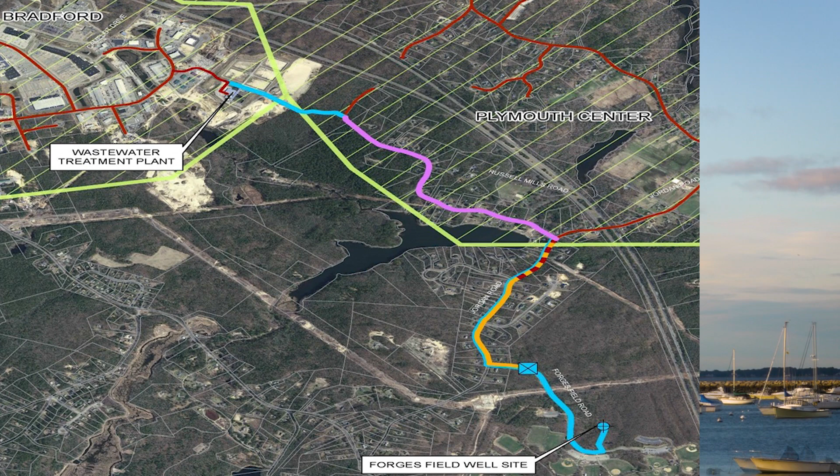We're going to talk about why we need new water supplies this evening. We'll give you a little bit more background and what we've been doing and why. We'll talk about the Forges Field well site, the pump test results, the effects or the impacts, if any, on nearby wells, what we've done to model the Eel River watershed group, and then what our future schedule is, and then we'll take questions, as I mentioned a minute ago.

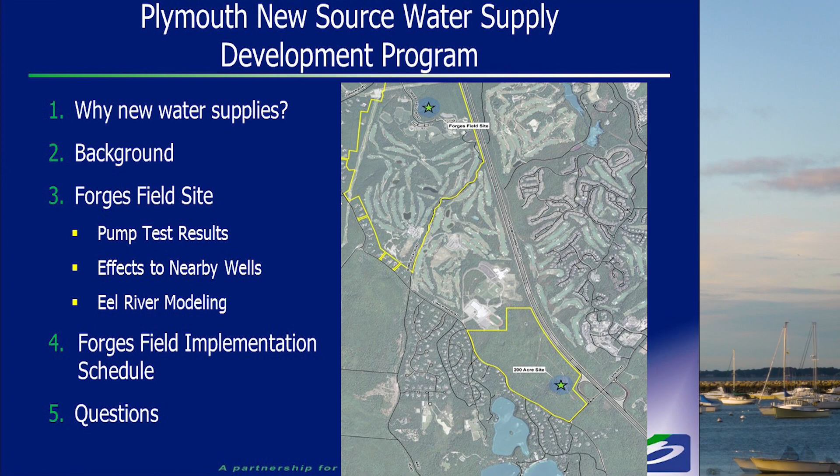Why do we need a new water supply? We need to allow for future economic development and the expansion of the water system as we have it today. We need to provide that emergency redundancy within our system and allow for flexibility of withdrawals and distribution. What we mean by that is as that peak demand increases in the summertime, we have to make sure we can feed that. We have about a 1 million gallon lack of water during those peak demand periods.

And then we need to make sure we can plan for long-term sustainability. And that's what this well will do. At least this well will start us down that road.

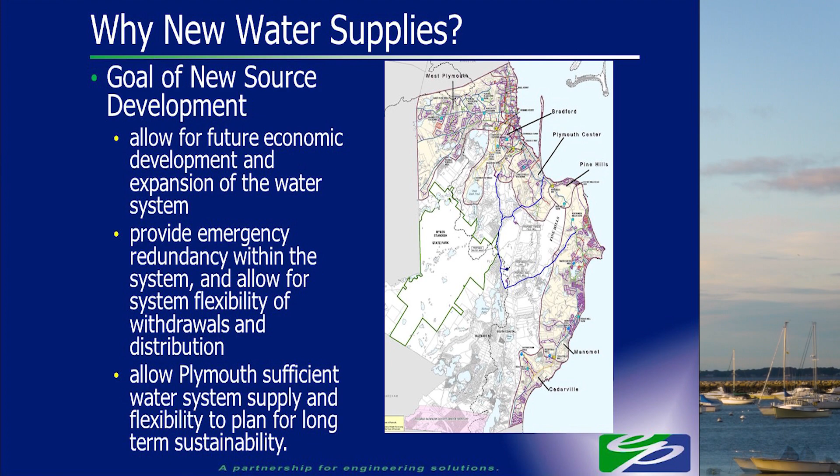This all dates back to our 2006 master plan. That's the last time that the town did a master plan. This past spring town meeting, they appropriated funding for us to start a master plan, which we are starting in a couple of months to really update that.

That master plan pointed out additional water supplies are needed, and we have redundancy issues at our current wells. We have pressure zone deficiencies, especially with Bradford, Cedarville, and Manomet. Some of the wells that 2006 master plan looked at had conservation restrictions on, so we need to make sure we were aware of that. And then there is a water storage deficit in terms of how much water we can pump into the tanks and store during those peak demand periods.

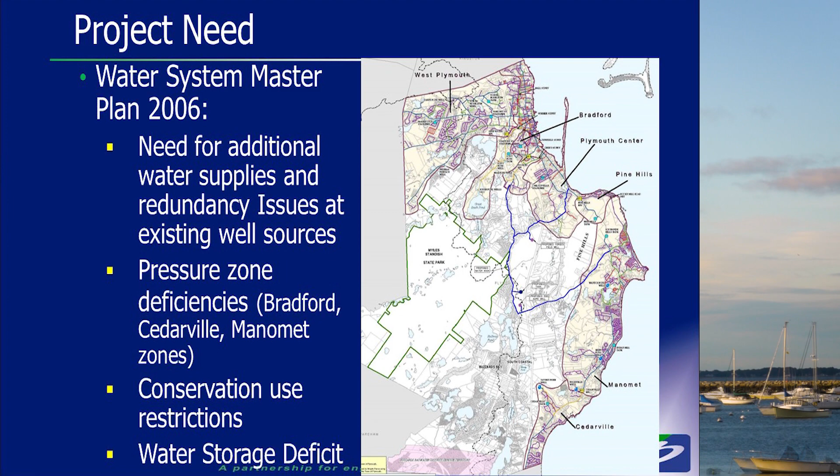So again, that master plan that was done back in 2006 identified 21 viable supply sites. Between 2008 and 2010, Horsley and Witten was the consultant the town used to do some exploration at 5 of those sites. Several months ago, the town really was looking at Forges Field and 200-acre sites, both those two. We did a lot of discussion, a lot of investigation, a lot of analysis, and we selected Forges Field as the site we went to town meeting for in the spring.

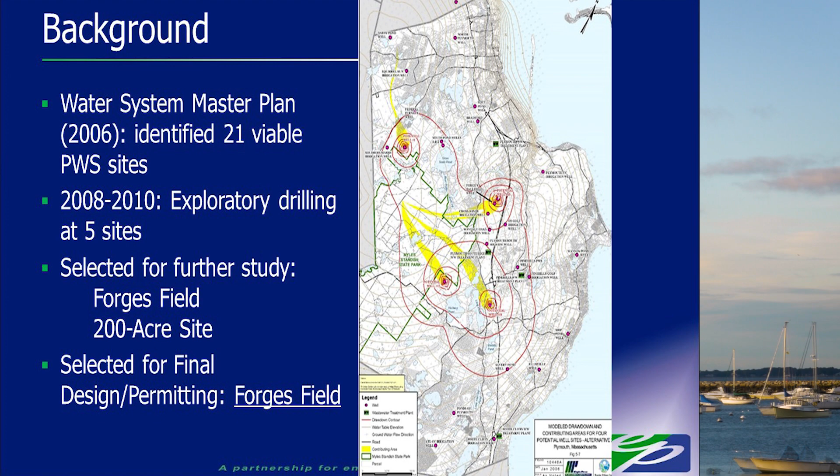Some of the benefits of Forges Field are reduced reliance on our stressed other sources, our other wells. Additional water to meet summer demands, which is really critical here. And then the redundancy for the Plymouth Center and Bradford zones. And ultimately, a lot of improved service pressures along Jordan Road and Russell Mills Road. And most of you are direct abutters, you understand that we have low pressure and some of those hydrants aren't even in service.

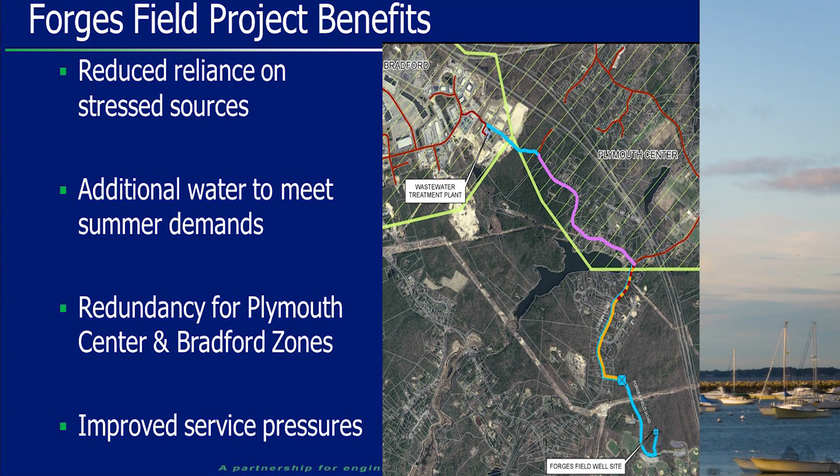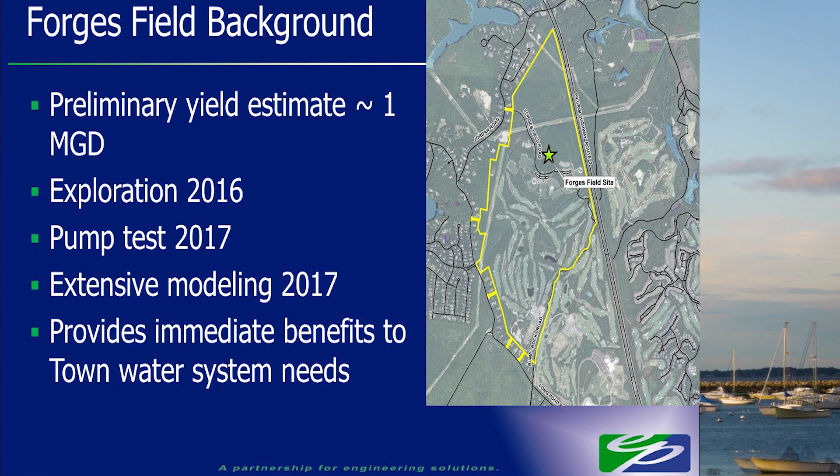So our preliminary estimate for the well is about 1 MGD, and that's what we're permitting it for. The exploration started back in 2016. We ran pump tests back in 2017, and we've done modeling since 2017 up until several months ago. And Forges Field well will provide immediate benefits to the town's water system.

So with that, I'm going to turn it over to Anne Marie from Environmental Partners. Thank you.

So I'm a hydrogeologist, and I was involved in a lot of the permitting of the water supply well, the testing, the exploration, and without getting into too much of the geology, I'm going to give you a big picture on what we did out there, what the well can produce, how we know it, a little on the geology, and then go into the modeling results, because we spent a lot of time trying to evaluate how this well will affect the surrounding area.

So again, this is the Forges Field site. This is where, in 2016, we put in 7 observation wells and 1 test well. We did exploration. All these wells go down to 130 feet below ground surface, which is where we hit bedrock. And the best aquifer material for water supply is down deep.

So the wells are all screened from about 125 feet to about 110 feet below ground surface. So it's a very deep well. The water table there is at 27 feet below ground surface, so we have a lot of water to work with there.

And so before we started the pump test, we put in water level loggers in all these wells, and they go out about 900 feet from the pumping well. And we monitored water levels hourly for a week before we started pumping the well, so we had background data on what the water levels are doing.

Then we turned on the pumping well and pumped that at about 750,000 gallons a day. Pumped the water well away so it's not coming back, and monitored the water levels in all of these wells. So we could get a good idea what the drawdown of the water table is at the well and as we get further away from the well. And that's what all went into the model, and so we could calibrate really nicely and close in at the well field and then use the existing model later, and I'll show you the model.

At the end of 5 days, we tested the water using all the required testing that DEP has, and water quality is excellent. It was just pH adjustment, which is typical in southeast Massachusetts. And the approvable yield using DEP's method was 1.048 million gallons a day. So it's about 728 gallons per minute. So that's what we put in the pump test report to permit the well.

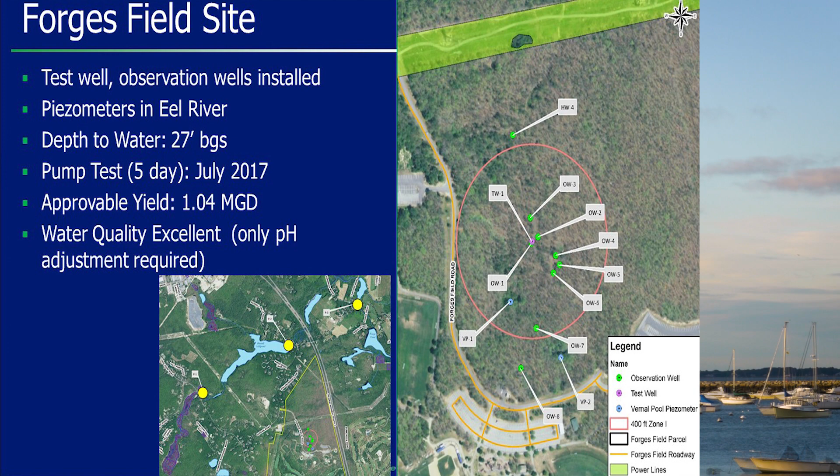So once we had all that data, worked it up, the USGS back in 2009 did a water supply model for Plymouth, Carver, Kingston, and Duxbury. They included all the production wells, any irrigation wells that they had, and the purpose of the model was to evaluate groundwater supply well impacts to the aquifer. So it was a tool for towns to use to evaluate any impacts from water supplies.

And so this is the whole model area. Here is where the Forges Field well is, right there. What we did is we took our water level data and put it into this huge USGS model, calibrated our water levels to the model, so it calibrated beautifully. And so once we knew that, we could pump the well and see how the water table reacts, and we can see where the well would get its water from. So with the model,

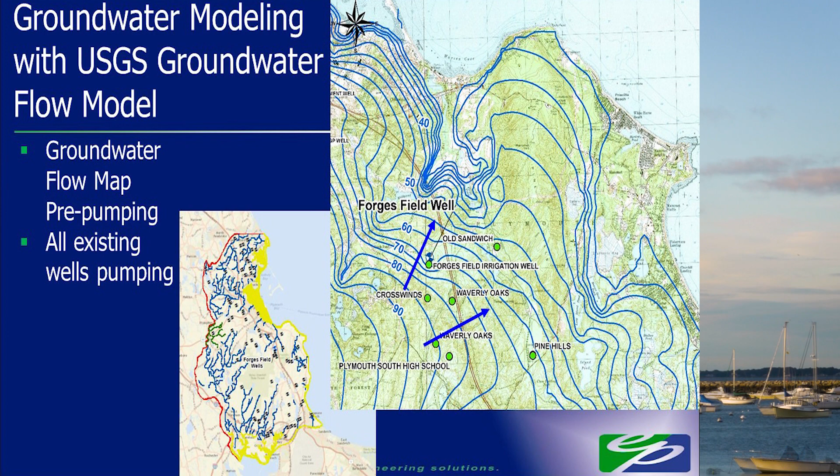let's see. And another thing, all the wells in Plymouth were pumping at the time we did our modeling. So we had the Bradford wells, the Lout Pond well, the South Pond wells, and all the irrigation wells that are in this area that pump very hard in the summer. They pump for 210 days a year, and then they don't pump in the winter. So we had all those pumping too. So we had everything going on, and we used the data for the last 5 years in terms of how these wells were pumping.

So then in our pump test report, DEP requires us, first of all, to figure out what our Zone 2 is, and this is the area that there are use restrictions. And the Zone 2 is defined: we pump the well in the model at the permitted pumping rate, which is 1 million gallons a day, and we have no recharge to the aquifer, so we're looking at severe drought conditions. And then we use the model to tell us where is that well going to get its water from. And that's what this area is here.

It goes out to Gunner's Exchange Pond. And here's the Forges Field well. These are the golf courses in here. And it's residential. So the Zone 2 land uses are all consistent with what Zone 2 DEP requirements are for land uses. So that would be drought conditions that rarely happen.

Then we wanted to look at if we pump the well at 1 million gallons a day for 100 years, how far out would we see drawdown to the water table? And that's what the area of influence is, and that's another thing DEP requires you to submit in your pump test report. So this line here represents the area of influence, and that is calculated by the 0.1 feet of drawdown with the well pumping 1 million gallons a day for 100 years.

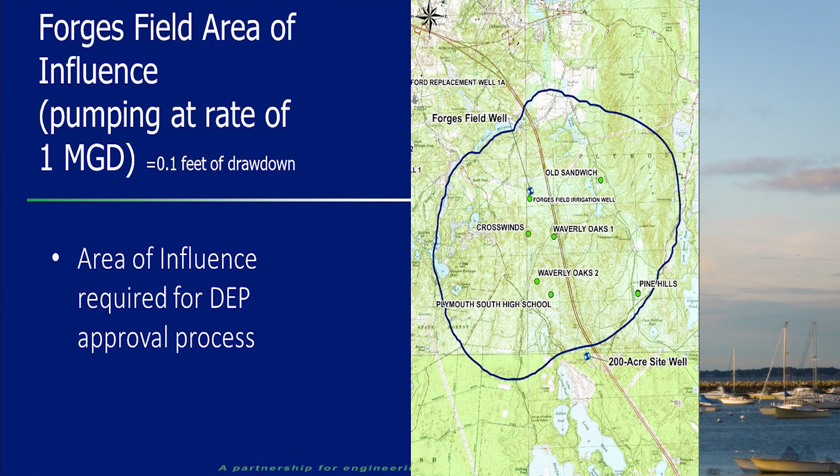So is it 0.1 feet at the border? At the border, yes. So inside of that, it could be more. Yes, and I'll show you on the next slide, it's a good question, because there's the drawdown inside and close into the Forges Field well. So here's the Forges Field well. Outside we have 0.5 feet of drawdown, 1 foot, 1.5, and then these are all 1 foot of drawdown.

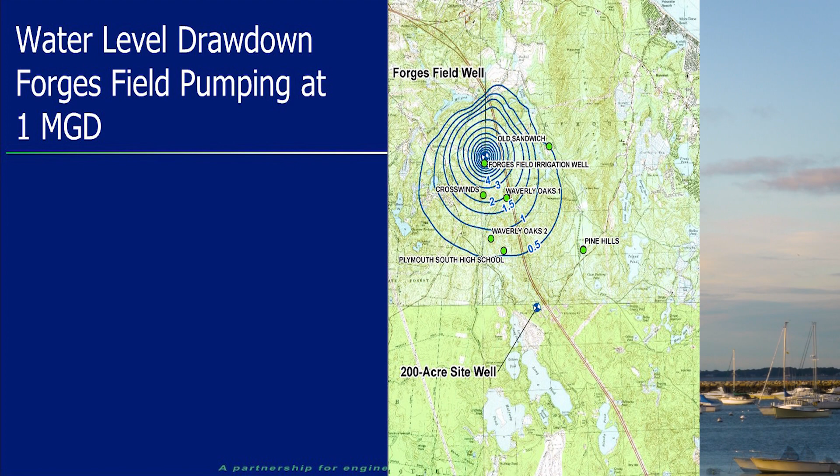So what we did is we wanted to see what is nearby that is in this area of drawdown. And again, this is 100 years of pumping. So this is equilibrium, and it takes about 5 to 10 years before you actually reach this. This is what's called steady state. And we had the irrigation wells pumping and all of the town wells pumping in the model. So we wanted to look at what the pumping effects are for the neighboring wells, knowing that everybody is on a private well in this area.

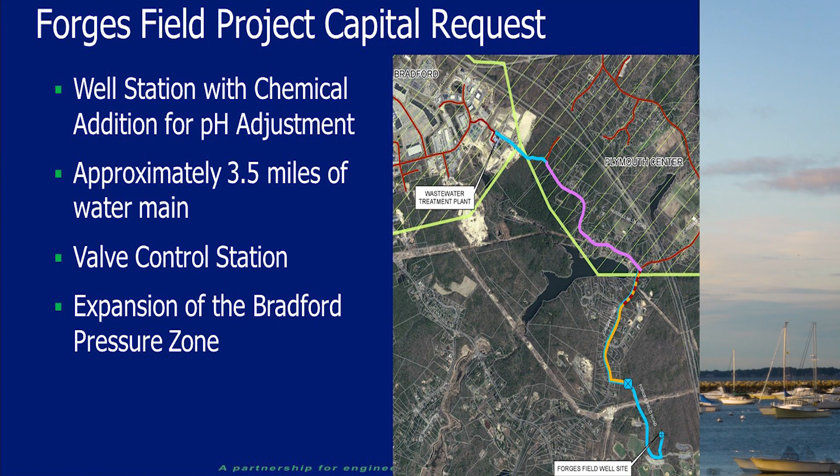I have a question. Would you please tell me again what part of town needs more water? The West Plymouth area. West Plymouth, like where? Charlotte Drive or all the way up to Carver or Route 80? Colony Place area, yep. So you're talking about the commercial section of town? Commercial section, residential. The whole zone is deficient for water supply right now. Residential and commercial? Correct, yep. The overall demand of that zone. This is going to help both? Yes. Thank you.

Yep. The water mains: as I mentioned before, we'll have parallel water mains along Jordan Road. There'll be one water main on one side of the street and one on the other side of the street, and this will separate the two different pressure zones.

Part of the project is to replace an undersized and old unlined cast iron pipe on this road, on Russell Mills Road. And as of right now, the design is pretty much final, and we're just going through a couple of the last permitting hurdles before we go out for bidding.

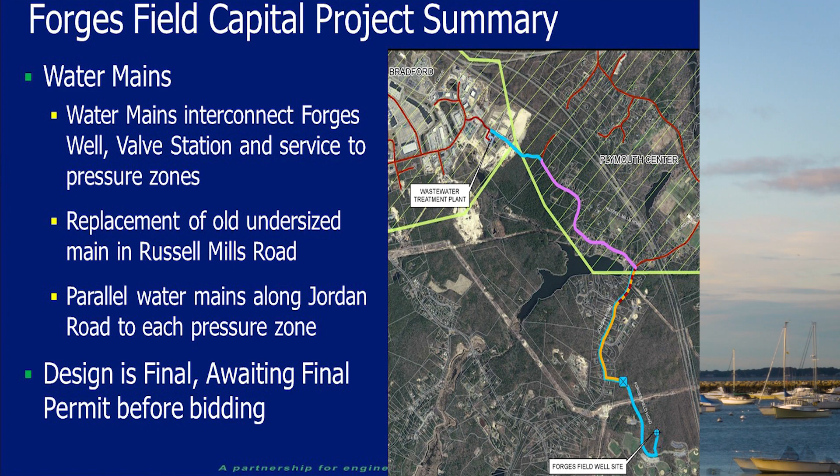If you can imagine, a project of this magnitude requires multiple steps to go through for permitting. And there's not only the local Plymouth Conservation Commission. I saw many of you at that meeting. We went there and received the approval. But we also went through multiple permits with the state. So I just want to go through those a little bit with you.

As Anne Marie mentioned, a lot of the data that we collected and she spoke about tonight was included in that pump test report that DEP has to look at. So DEP has their own hydrogeologists. They go through and double check all the modeling efforts that we've gone through, all the water quality data, make sure that we're doing our job correctly. And there's a whole entire permit and report format that we have to follow and submit. That was submitted, and we actually received that approval last week.

Because of the magnitude of adding a source to a water system and by expanding the water system in this magnitude, we had to submit an expanded environmental notification form with the state. That was submitted earlier this year, and I believe sometime in March or April, we received this certificate with no further action required. That process essentially notifies every single state agency for comment on this environmental project. So it could be the Division of Marine and Fisheries, could be the Mass Historical Commission, all these different state departments get a chance to comment on major projects like this.

And then with the local MassDEP in the Southeast region, we had to submit an approval to construct the source, which those design plans that are up at the top there, along with all the project specifications, we have to submit for their review and approval. We actually got that approval this morning, so that was good news.

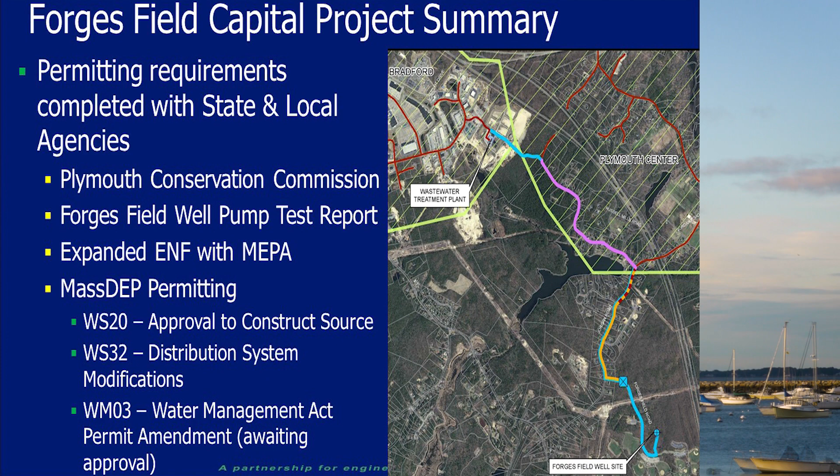We'll be submitting comments back to them, and we can anticipate a draft permit, new permit to be issued sometime in late August or early September. And then from there, we'll get into a little bit of our schedule for construction. So as you know, in April 2017, the design and permitting and bidding was approved. And this past town meeting, construction money was approved for this project.

And these are the tentative dates, depending upon the permitting cycle. We're looking at water main construction potentially over the winter, potentially next spring. But the bottom line is we're going to be looking at a very heavy construction season in 2019 and hope to have everything online in the winter of 2019 to 2020.

We anticipated doing a lot of public outreach during construction, similar to tonight. We're going to be putting the final contract documents on the town's website. Each of the homes along the project route will also be flyered, which means a notification will be stuffed in your door. Typically, we like to let you know at least 48 hours in advance of when construction will be going by your home and whether or not you'll be impacted by any of the work, so that you can take an alternate route to get to work or to the grocery store.

We'll also be providing updates on the town website, and whenever we give you a construction flyer, we'll have all that information there for you on where to go to get more information. We'll have our email addresses on there, our phone numbers. You can give us a call if you have any questions.

Some of you may or may not be on town water. Every property along the route will receive a new curb stop. A curb stop is essentially a valve that allows you to access water in the future. At this point in time, there's no requirement to connect to the water system. However, it'll be left at your property line so that if you have the need to connect to town water, you'll be able to. And that'll be for all the routes that we showed you from Forges Field Road, north along Jordan Road to Russell Mills Road, wherever we're doing the water main work.

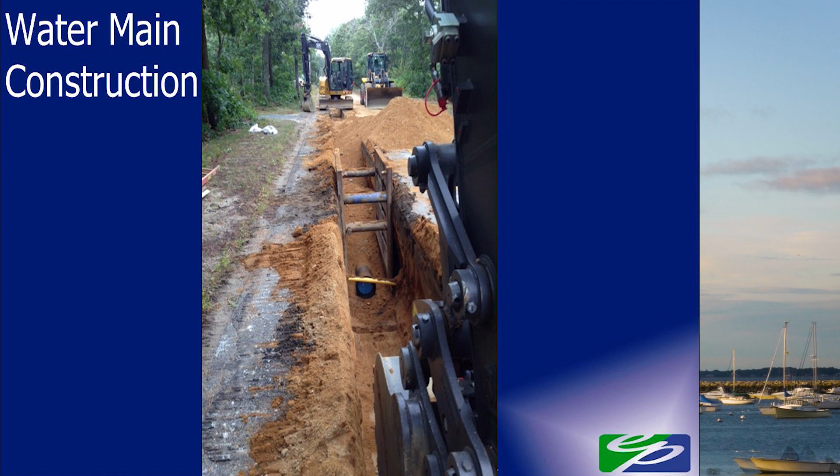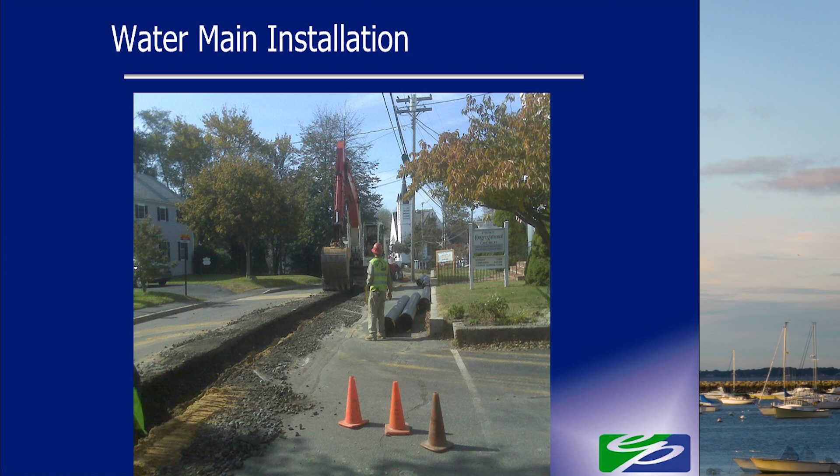So I just want to go through a couple of quick photographs about what construction looks like, and you can stop me at any time if you have questions. Generally, the water main trenches are about 4 feet in width. They excavate about 5.5 feet to 6 feet down. This type of material is going to be very similar to what you're going to find here in Plymouth, mostly all sand. And the contractors move fairly quickly. You'll be surprised. You might go out in the morning, go to work, and by the time you get home, they might be 200-300 feet down the road. So they move very quickly.

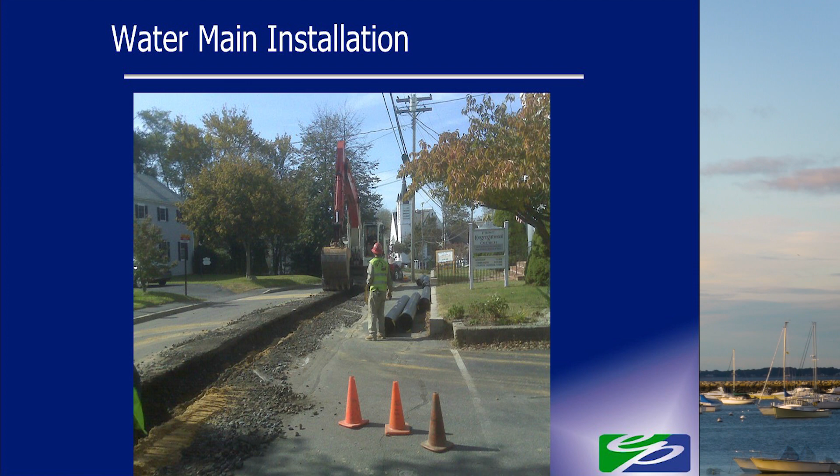They tend to excavate the asphalt and grind that down. Then they start removing some of the dirt off the top of the trench, as you can see here. They excavate the soil out of the trench, put the pipe in, and then backfill and compact it as they go. And then at the end of each day, they sweep the road, bringing up the grade with a gravel material, and then every single Friday, that trench will be paved so that traffic is fine for the weekends.

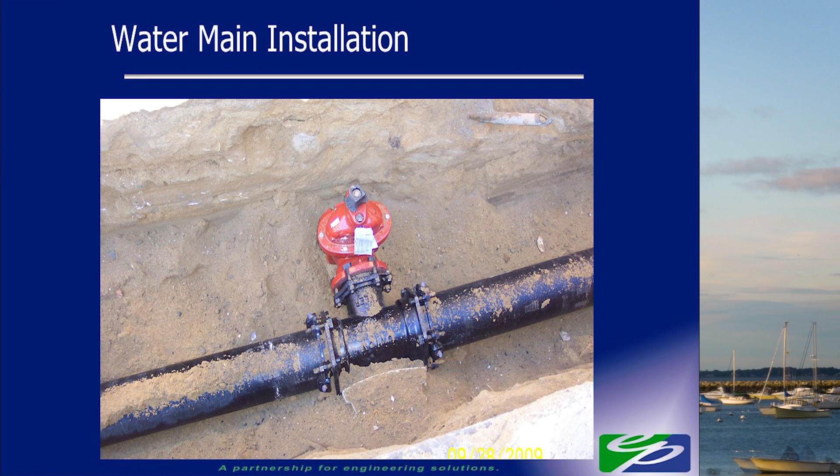Okay. This is just what a typical valve looks like. Most of the pipe will be ductile iron. It's pretty much the standard of what's used nowadays for water mains. And this is a standard valve that would go to a fire hydrant or a larger commercial connection. This valve bonnet right here and this nut is what allows you to control the valve going up and down. So if you see some of the guys with these long rods going into the ground on the side of the road, that's them trying to turn a valve on or off in the water system.

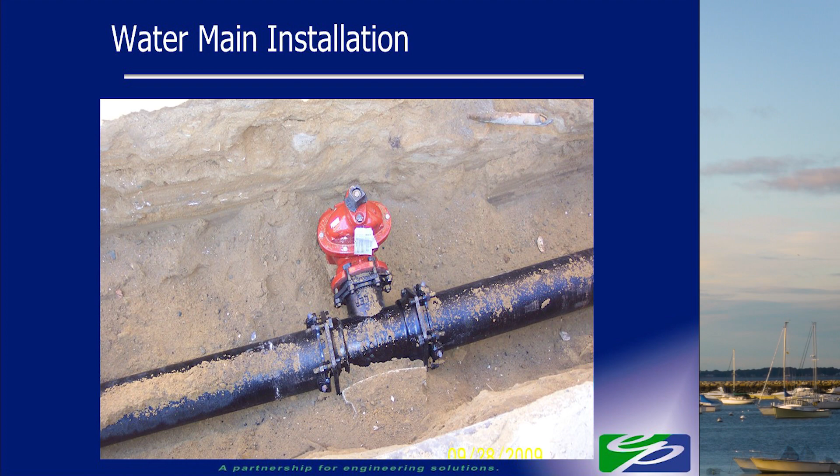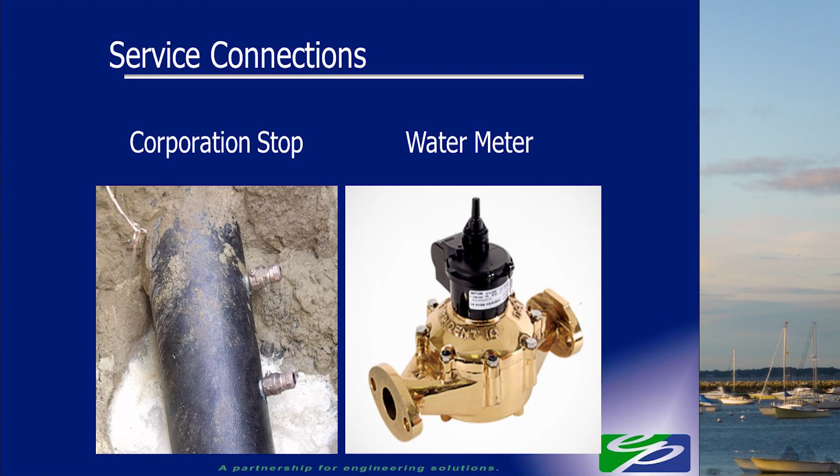Okay, so that was just hopefully a very quick, basic understanding of construction. You know, we won't be strangers.

The best construction projects go smoothly when we have everyone's buy-in, not just the contractor and our clients, it's also the public. We want to make sure everyone's understanding what's going on. And of course, there'll be police details out there along the roads to direct you around construction. One of the questions I always get asked is, how can I access my driveway if there's a trench going by it? We typically always require the contractor to have steel plates on site. So those big steel plates can get easily put right across the trench, and you can drive right into your driveway.

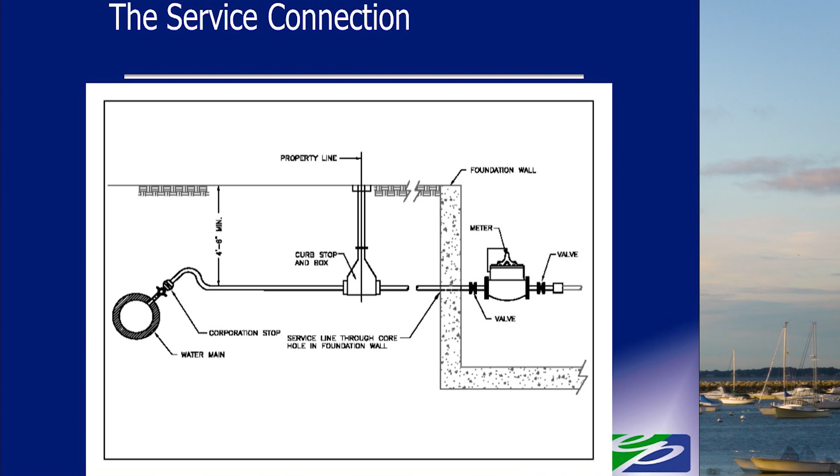So just to wrap up, I think we've mentioned multiple times tonight, and hopefully we've hammered it home, this project is really to do all these items here. We need the additional water to help meet summer demands. Right now, we're doing our best to meet every demand that we have in the summer, as best we can with the supplies that we have currently. This will provide a lot of extra redundancy, another interconnection between the two pressure zones, which will allow us to bring water from the higher zone to the lower zone.

And it'll also give some expanded fire protection along Jordan Road, Forges Field Road, and also better fire protection on Russell Mills Road in this whole area. So this project in general will just help the whole water system be more sustainable. So, thank you.

Just 1 second. Thank you, Ryan and Anne Marie. I thought that was very well done. Again, we'll take a bunch of questions. Everybody can ask whatever they'd like. We have a lot of experts in the room to answer those questions. As Ryan mentioned, you can check the town's homepage for any information, updates, construction. I always get asked about schedules and impacts.

Until we actually have a contractor on board, the well and the valve station won't really affect the residents at all. It'll be the water main. Once we have a contractor on board, we'll have a schedule from that contractor, and we'll publish that. You'll get another notification in the mail. We'll send some more information out to you as far as what the schedule looks like and what your potential impacts are. And again, you have all our contact information. You can reach us and call us anytime. With that, we're happy to take any questions, and thank you very much.

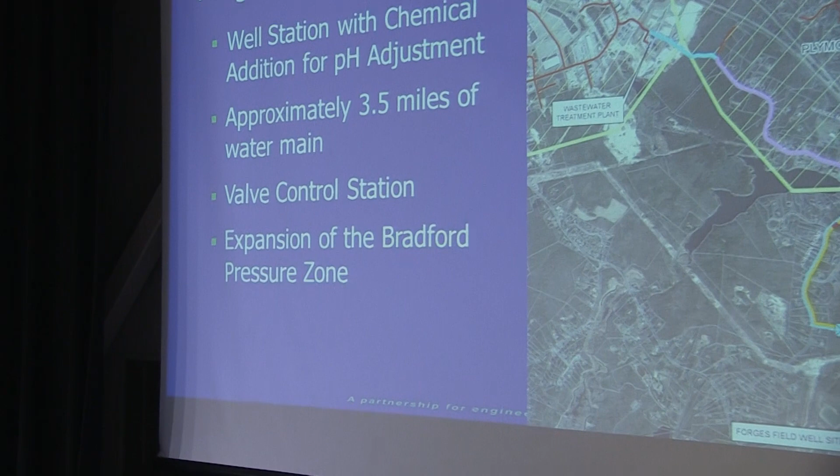I know it seems like maybe we could have gone down Jordan Road to Long Pond Road instead, and I want to let you know that that was certainly looked at. As far as cost, the route that we've chosen is actually 2,000 feet shorter. And at about $200 a foot, that adds up pretty quickly, okay? But the most important part of this is it's not always about money. It's about actually physically being able to do that with the hydraulics of the current water system as they are right now.

And as JB mentioned, because the elevation of the road along Jordan Road gets a little higher towards Long Pond Road, the pressures in the Bradford zone can't fully support extending that zone all the way out to that area. And the pressure in the Plymouth Center zone that we're connected to is lower than the Bradford zone, so that would be even more troublesome. So if we were to extend the main down to Long Pond Road, along Jordan Road, there wouldn't be sufficient fire flows to help protect your homes.

And the pressures that you would receive would be very low and would hardly meet the minimum requirements set by the American Water Works Association of about 35 PSI. You may each have a pressure tank in your basements. If you go look, some of them have pressure gauges on them. You can see most of the wells are typically set between 40 and 60 PSI on the gauge.

So if you can see in your house, the difference of going all the way down to the bottom is fairly significant. So it's not a goal of any of our designs, or hopefully the town, that we would try to provide something that would be inferior to the standard service that you're currently getting.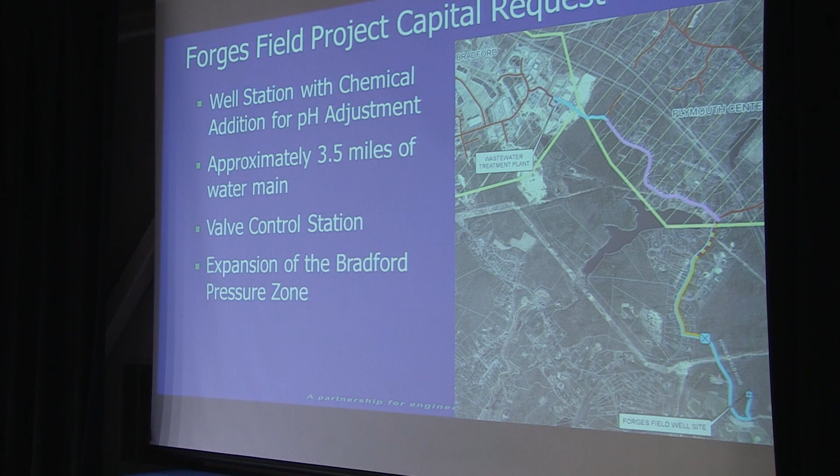Just going back to the maps, oh, sorry, go ahead. Could you use the mic? No, please use the microphone. Oh, yeah. Thank you. Okay. Just a question, when you did the measurements? Oh, here we go. Go easy.

All right, and I'm looking at 53, 57, right in there. What screen level are you determining, because the wells in that area that provide water to the houses have different depths that they go to? Is that the minimum depth, or is that an estimated depth, where you have the screens on the map there?

That is what the driller put on the drill logs that they filed with DEP and the Board of Health. So they gave you the top of the screen, the bottom of the screen, and the water table when they drilled the well. Okay. All the houses? All of those, yes. Okay. All right, that was the question I had. Thank you.

Yes. I'm Rebecca Conroy, and I live at 21 Rollingwood Lane. And I was wondering, what will you have for curb access for water at 21 Rollingwood and the rest of Rollingwood Lane?

You probably can see from the plans there, we're just at this point going along Jordan Road, and at any road we go past, we'll be leaving a water main stub into the subdivision to serve them in the future. So at that water main stub, would you put a fire hydrant there for our street? The fire hydrants, usually we like to put them at each intersection, and if you want to stay after, I can review the one that's potentially near Rollingwood, because the standard is to put them at every 500 feet for fire department purposes. And the plans are in draft right now, because actually the next step is to review everything with the fire department to make sure that they approve of all the locations that we've shown.

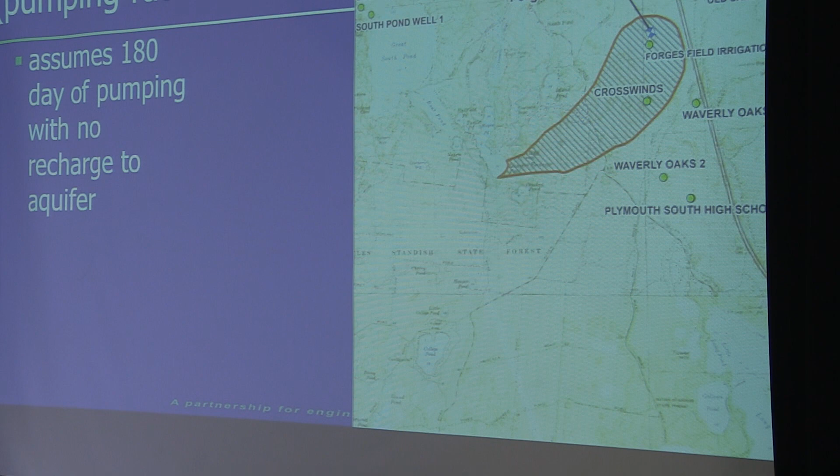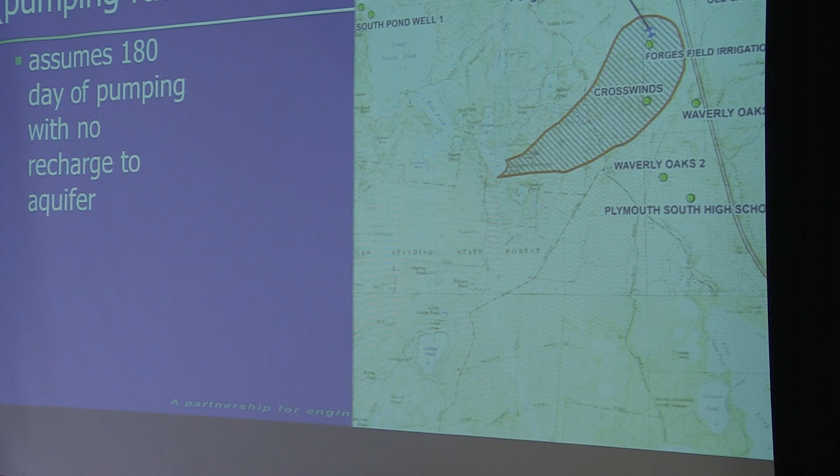And the red circle says, if I have no recharge, so now I'm getting everything from the aquifer, that shows where the water particles come from, which is different from where you have drawdown. This map tracks the particles that actually make it to the well. And as those particles make it to the well, it does lower the water table. So on that map, could you tell me where 75 Jordan Road is in relation to that well? Is that in Zone 2? It is? 75, I have to look at the cross section. I have some bad news for you.

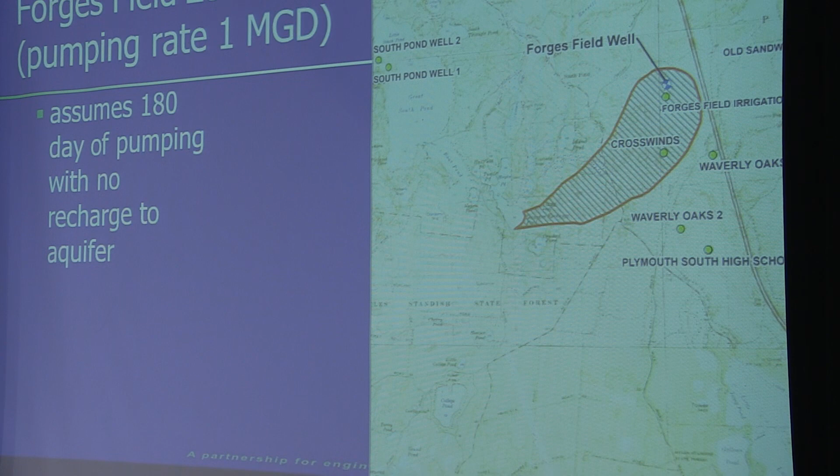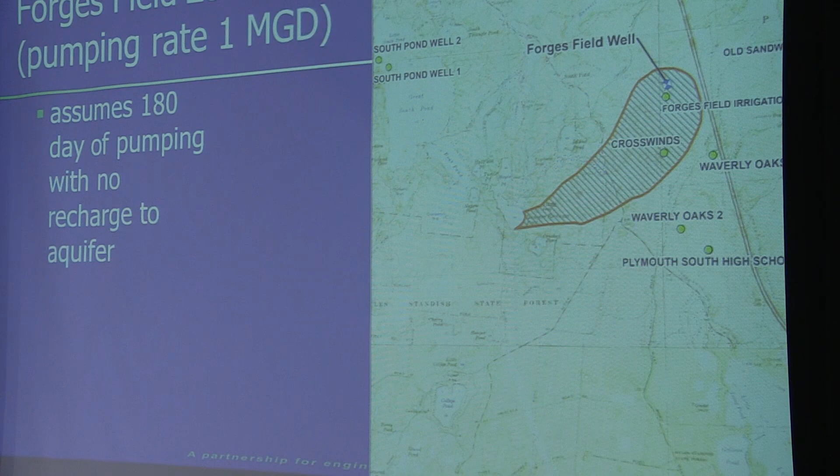I own that property. It's a brownfield property. It's contaminated, and it's been that way for the past 10 years. It still has not met remediation. Yeah, no, I believe it's outside. I believe we looked at that specific one. I believe it's 73, 75 Jordan Road. It's, if you can give me a map, it's right opposite Russell Mill Road.

Yeah, I know where you are. We're pretty confident we looked at it, and it's not inside the Zone 2. It's not in the zone? Jordan Road is not. My property abuts Forges Field on the north end, right? Was that a comment that was submitted, a formal comment? Because I took that formal comment and the location of the site, and it was outside our Zone 2.

I went to the DEP website and looked at it. I abut Forges Field, so the Zone 2 has to be... But the Forges Field site does extend quite a bit north. Richard, we could look into it and give you an exact determination. We'll respond to you, okay? I'm just worried about... I have looked at that. I can get you a map.

It's a contaminated property. It has been for 15 years, and it's been in remediation for probably 10, but it hasn't met remediation yet. And it's a brownfield property, and it abuts Forges Field. It's not like in another district. It abuts the property. It used to be the same property as Forges Field, but it was subdivided. So it's not like there's a line or a space between Forges Field and that property.

Right, but just a point of information, the well's here, the Zone 2, and what the Zone 2 defines, Richard, is that's the area of influence when the well is pumping. So the well is drawing all the water from this area here. So I think your property's up over here. Right, I believe it is. It's up there, so.

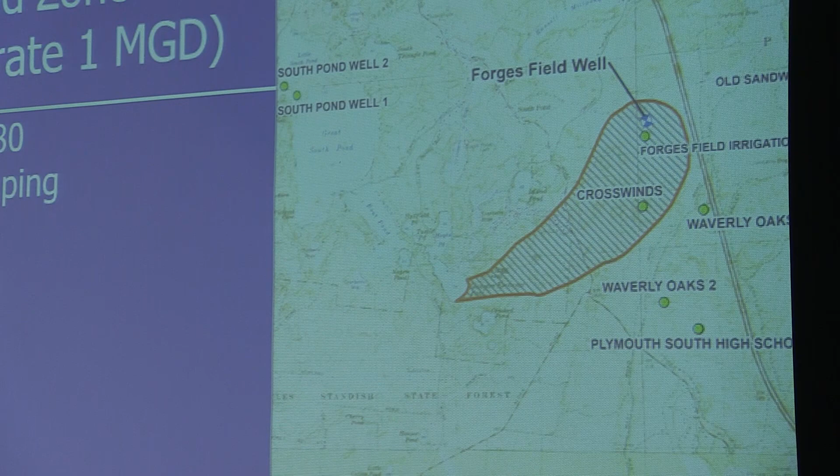Correct. It really draws from upslope, from uphill, so it doesn't draw a lot from the down gradient side. You can tell by the shape, that's where it's getting all the water that's coming towards the well, and it has to pull it uphill to get it from down gradient sites. The water table's lower as you go down. I understand water doesn't run uphill, but I would have great concern. Groundwater flows down, so the water levels are lower. Okay, but we'll look into it and we'll respond. Yeah, we are gonna submit formal comments, so.

Hi, everyone. My name is Marlene McCollum. I'm your Assistant Town Manager, and I want to speak a little bit about the Zone 2 in regards to kind of a larger look. You may or may not know there are 12 wells in the town, and they all have this Zone 2 that is contributing to the water. And we are taking contamination very seriously, and we will be coming to town meeting before your town meeting reps in October to strengthen our Zone 2 regulations.

We certainly do realize that our land use has an impact on our water quality, and we're very fortunate that we have good water quality and that we don't have to treat our water at a high cost beyond some pH modification, which is very minimal. So while we're talking about this, I do want you to know that we're taking your potable water quality very seriously, and we hope that you also speak to your town meeting reps and support us as we try to strengthen those regulations. Thank you.

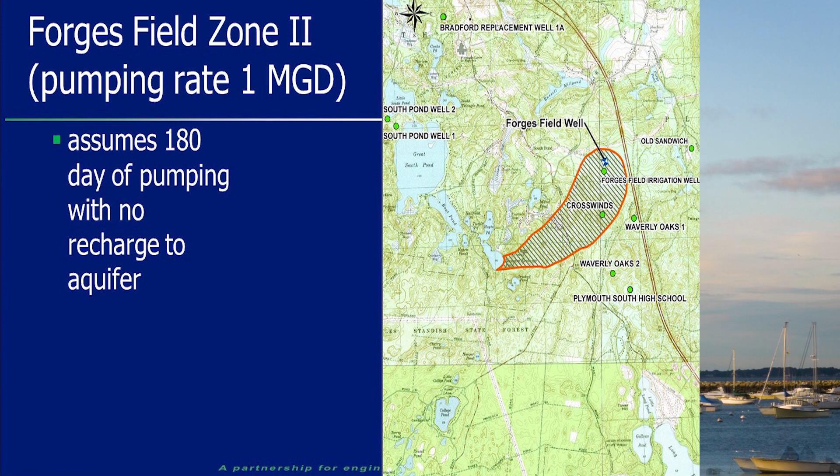I had another question. You mentioned that the difference in footage from running this down Jordan and up Russell Mills Road versus going down Long Pond Road was something like 2,000 feet, and construction would be $200 a foot. And I'm remembering what my brother Daniel Enos said at another meeting, where he suggested running the water line down Long Pond Road so that people could connect to the water line and bring revenue to the town with their water bills. So that's 2,000 feet at $200 a foot. That's less than $500,000, and you can recoup that in pretty fast time, possibly.

And I have a question about, you said there's some contamination, ma'am, I guess, in the northeast area. Were you referring to the same one that Mr. Withington was referring to? Okay. But again, I'm not sure, but right next to the Eel River on Russell Mills Road, where the old mill used to be, I think that used to have scrap rubber in it or something like that. That's what I learned years ago. Okay, so the Zone 2 doesn't go anywhere near Russell Mills. Well, now I'm thinking about Russell Mills Road, because that's where I live. And you said it was 3.5 miles.

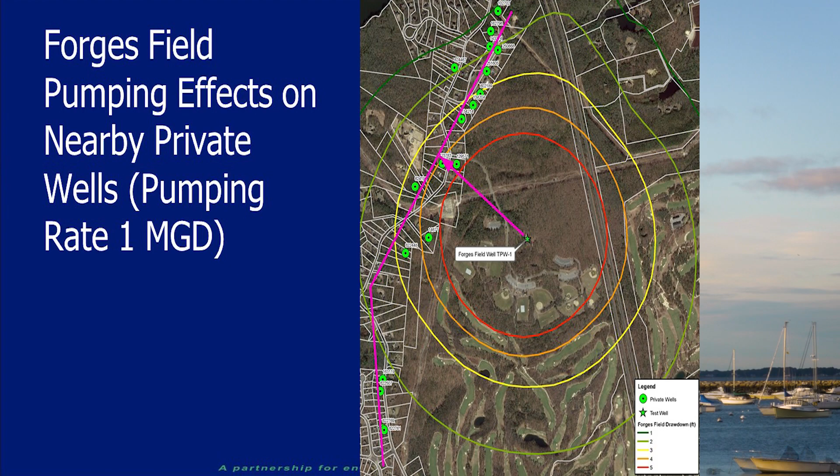Okay, I guess I have one last comment, which really concerns me. I was checking with a local expert, well, at the last public meeting, that not so many people heard about, talking about the actual construction along Russell Mills Road, because that's where the Eel River is, okay?

The Russell Mills Pond, and then it flows over the dam into the Eel River. And in that area, the construction is something that, and I'm not an engineer, but I've never heard of it. Right now, the existing construction of every water line that I've ever heard about going under a bridge or something like that, the pipes are just attached to the bridge. But in this case, someone proposes a construction of tunneling under the Eel River and back up again.

Okay, seems to me as though it would be a heck of a lot simpler, and it's been done since the beginning of time. Why did you change the design? Is that so somebody else can make a whole lot of money doing that? No, this is actually the least impact to the environmental resource area and less costly than actually trying to hang a pipe that's insulated over a bridge, and this type of work now is done all the time.

You can, but just because it's insulated, you can still put another coat around that. I guess. I mean, I don't understand that whole thing, and I know maybe you're not prepared to show us that, but isn't that rather expensive? How do I find out what the cost of that is versus just running the pipe for 20 feet across the Eel River?